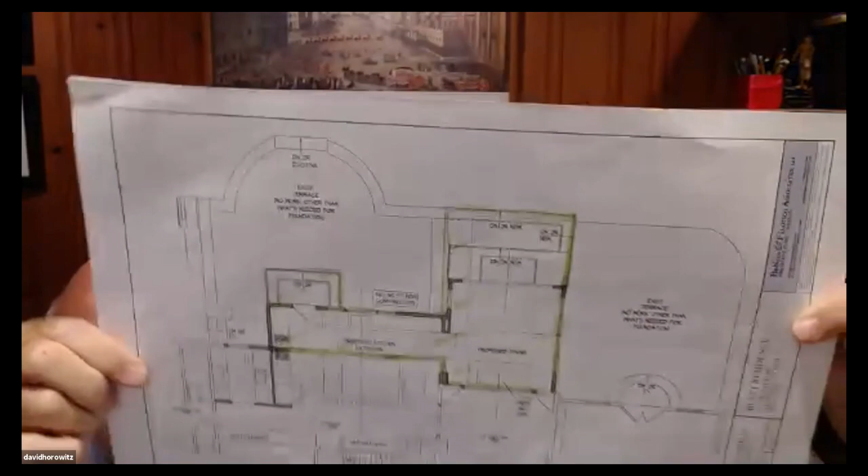Can you guys see this? Is this, what's in green, considered the new? What page is that, David? 101 - hold on, I'm going to pop this up on my screen.

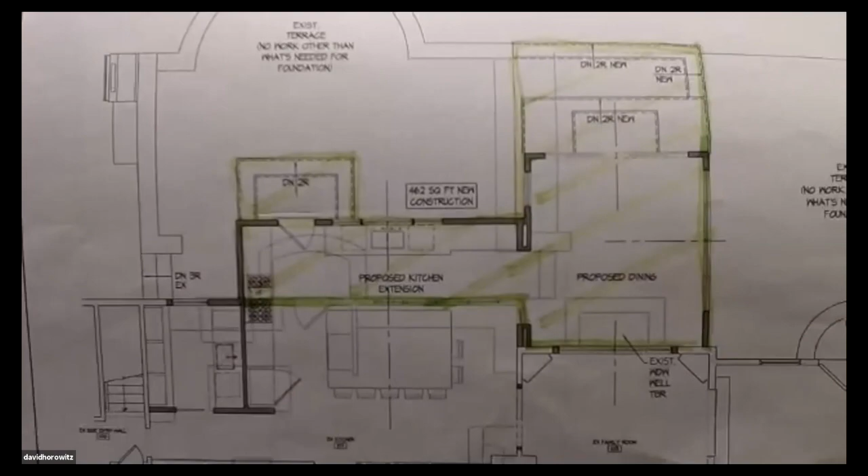I don't know if you can see my colored markup. Yeah, except a lot of that, David, is being built over existing. Well, that's what I'm asking. I think David was showing it to us because it highlights that area between the two patios, right? Correct - so if you take a look, if you can see my screen.

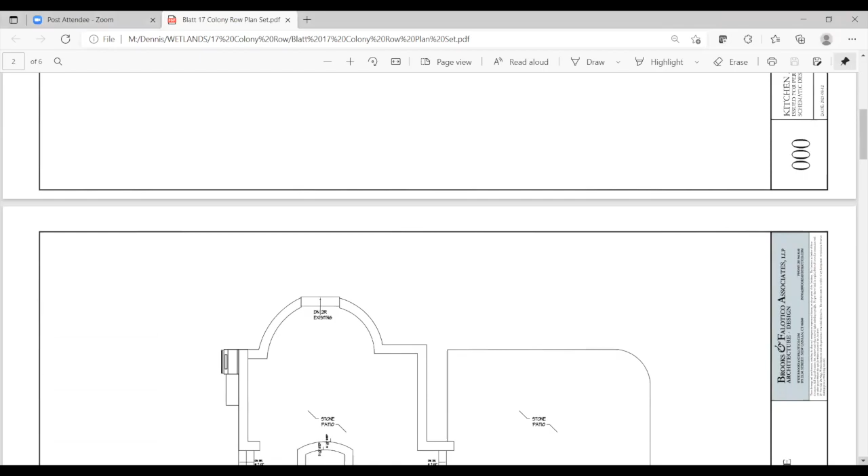What's the number on the bottom, Dave? Oh, there you go. Somebody's screen sharing - what a good idea. What number? I don't see a page number actually. 101 PL - right, that's the one. I was told to facilitate the discussion.

So this is what's existing. And basically, if you go - my eyes aren't picking up this designation, but basically where you see, I think it says DN2R - if you go up screen, and if you see my cursor, this is the area that basically is existing shrub planting bed. There was another small square-shaped bed here that's just surrounded by all impervious surface, and this was just a little alleyway of planting bed.

What's that about - was that about 3 feet wide? Yeah, that's why the calculation of approximately 90 square feet is mostly driven by the length, certainly not the width. And the two patios that are marked stone patios, are they all set in concrete, or are they semi-permeable, or completely impermeable? From my walking on them, I would say impermeable.

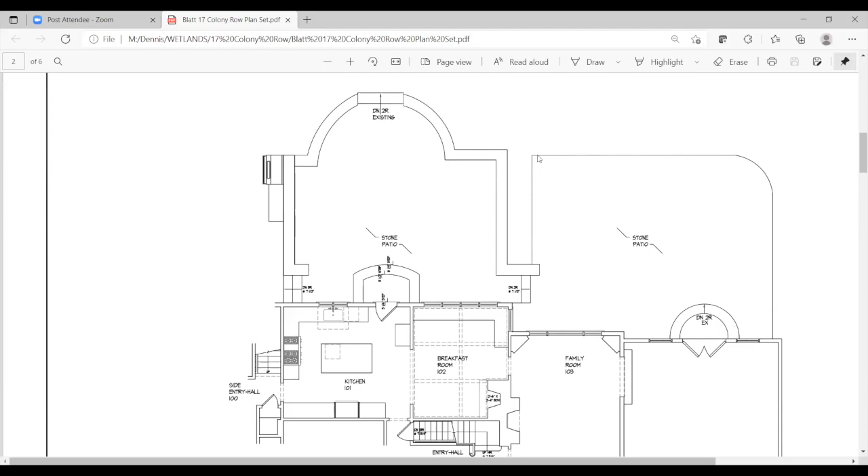101? Okay, you can see that on 101 PL. Okay, that's going to be next - hold on, let me get to the next sheet.

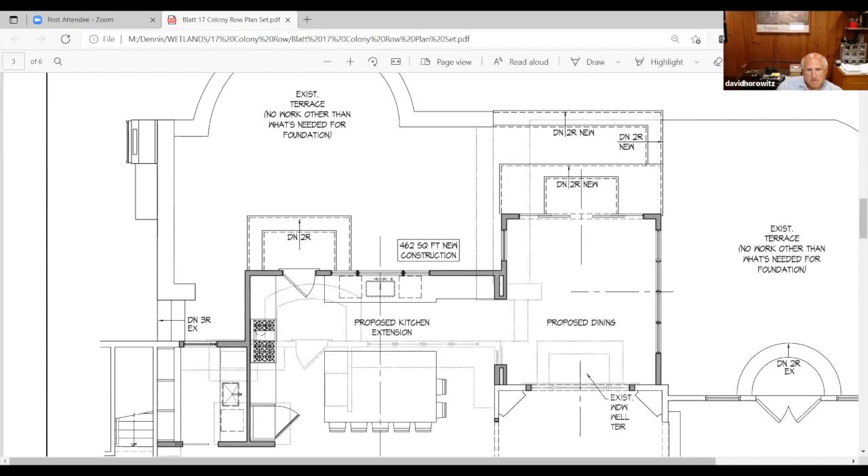Now, which one is that? That's 101 - if you go two more pages, it's actually highlighted for you, makes it very easy to see. Yeah, 101, sorry - trying to be green, double-sided didn't help. I agree. Oh, there it is.

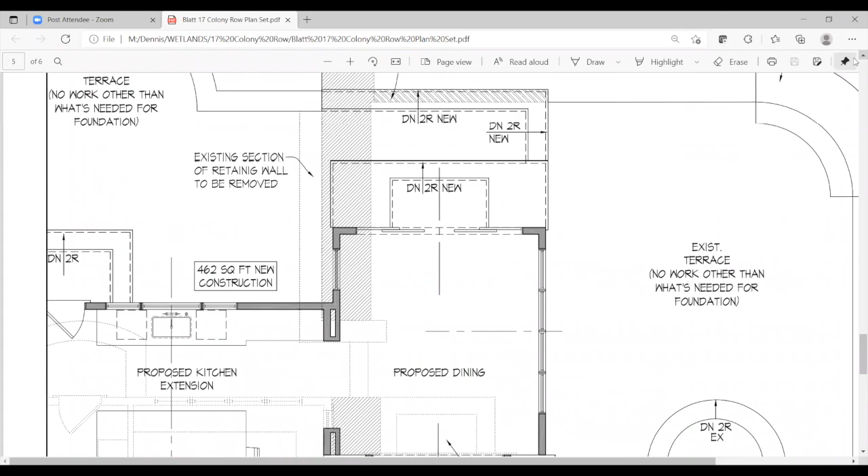So the hatched area is what's being built upon, that's new. Right, 80 plus 10, that's where I came up with the 90.

Dennis, now that if they're making changes to the impervious area, are they picking up the downspouts somehow from the new roof? I would say they're going to have to. That really wasn't discussed at length, but that's going to have to be addressed in permit conditions and obviously in the building permit as well. Okay, we haven't.

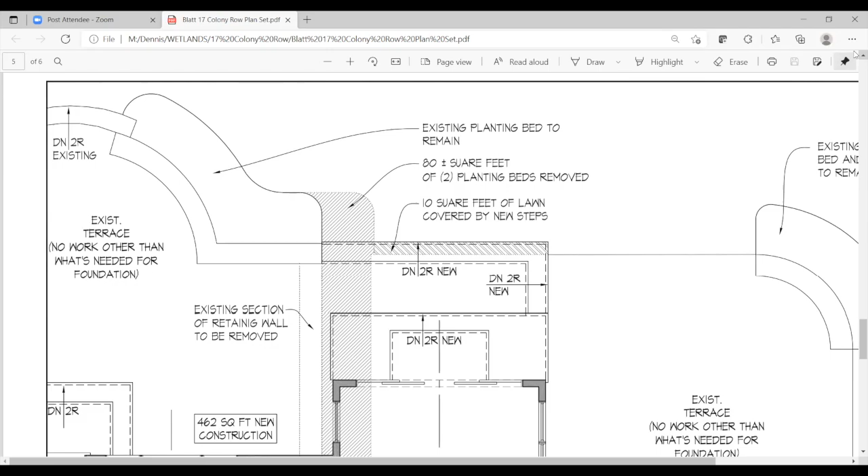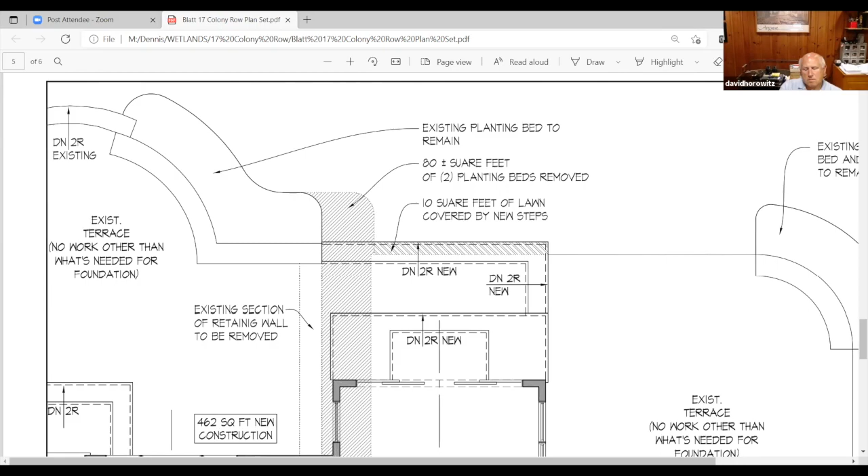Okay, then I think it's time to entertain a motion to grant the application on the condition that prior to issuance of the permit, additional more detailed architectural drawings show how stormwater from the new extension will either be handled on its own or tied into the existing gutter system, et cetera, and be subject to the environmental coordinator's review and approval.

I'll make that motion, like you said. I'll second it. All in favor?

Aye. Aye. Aye. Aye. Aye.

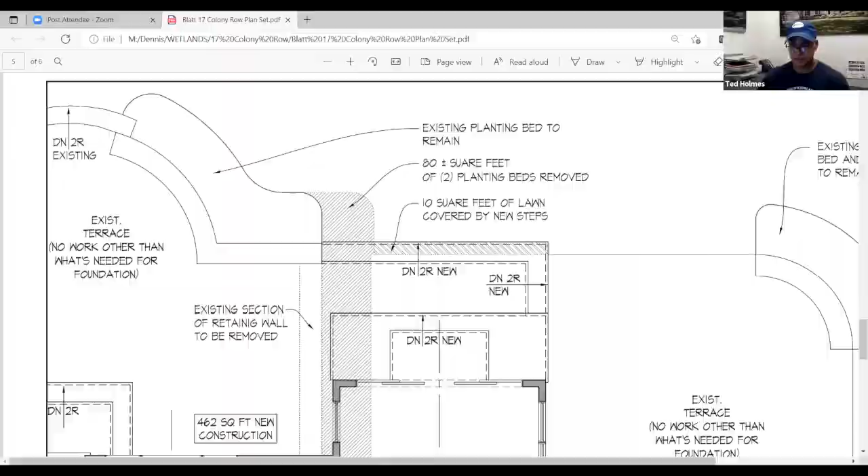Okay, we're good. Thank you, Ms. Blatt. Great, thank you guys very much. Good luck with this. Thank you.

Okay, that's it for the agenda, Dennis? That was it. Okay.

The only other bit of news I'll share is that over the summer we got an application from a new potential member to join us. I've been trading phone calls with him, trying to put together a time to talk in a little detail and see whether he's really going to be interested once he knows what we do, and whether he'll realize it's not as glamorous as it sounds. He's not going to be able to render a comprehensive environmental finding and opinion on the entire form-based code, for instance.

But no, he sounds like a decent guy. He just moved in from Ossining and has supposedly some related experience while he was there. So we'll see, and I'll report back after I talk to him, and maybe it might make sense for one or two of you guys to talk to him as well if you're interested.